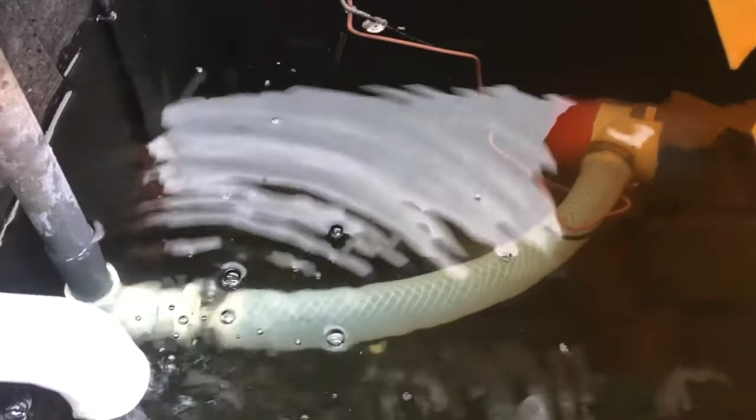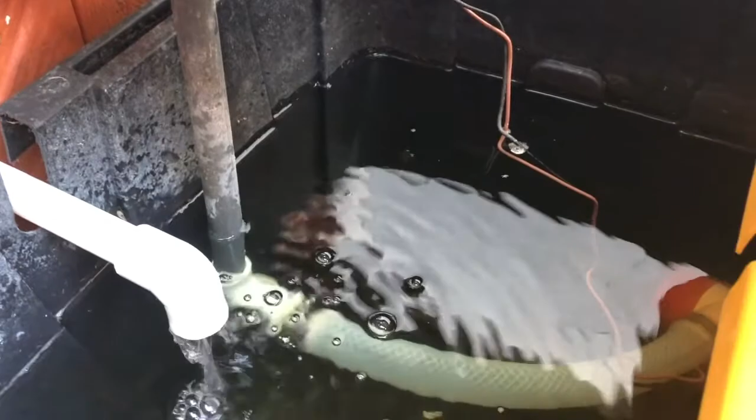And it runs on a timer, so I'm still playing around with how often it runs and for how long. But currently it runs every minute and a half or every 2 minutes for a few seconds, and it basically dumps a bunch of water in here and then it sort of slowly trickles down.

It comes down here in this last pipe and it goes into this particular reservoir. So down here you see the water flow, it sort of averages out at the bottom. You can see I have some other plants, here's the pump and so forth.

And you can see I have some other plants, but these plants currently are incomplete. Here is a little sensor that I got off Alibaba or someplace like that, that I'm planning to use for water level measurements, because the thing that happens is when it's warm, these plants consume an incredible amount of water real quick.

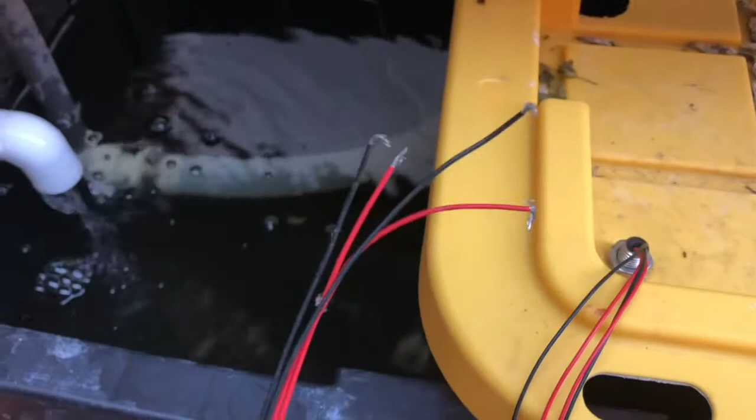And as soon as there's no water, the plants die. So it's really important that you have enough water all the time. And I tend to forget, you get busy and something happens, so I want to have notification functionality for when there's not enough water in the tank.

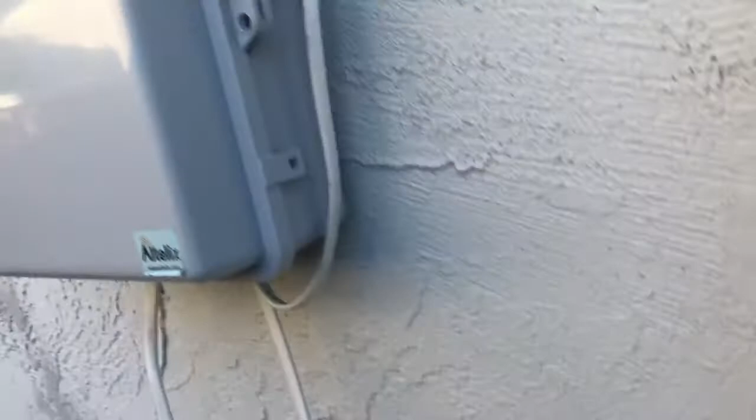So finally, this is all a little provisional. Here's my electronics box, and this looks a lot more complicated than it should be, but it is. So what I ended up doing is - let me go back to the old system. That's the old system from the other side.

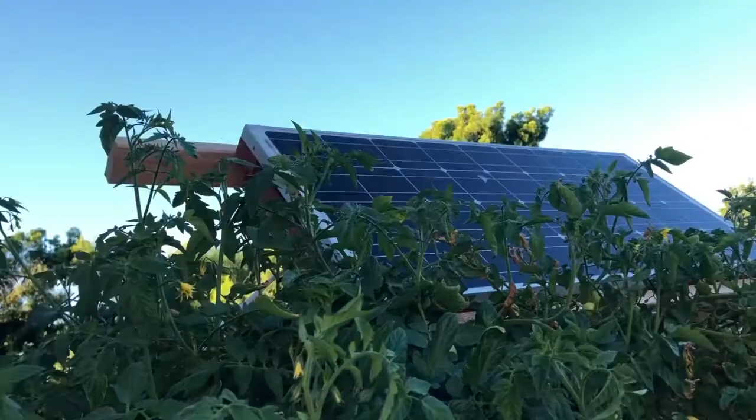There is the solar panel up here, which was basically the cheapest solar panel I could find on Amazon. And then down here is a little box that contains a battery. So this is now an off-grid system, which is nice because if power goes down for whatever reason, my plants don't die.

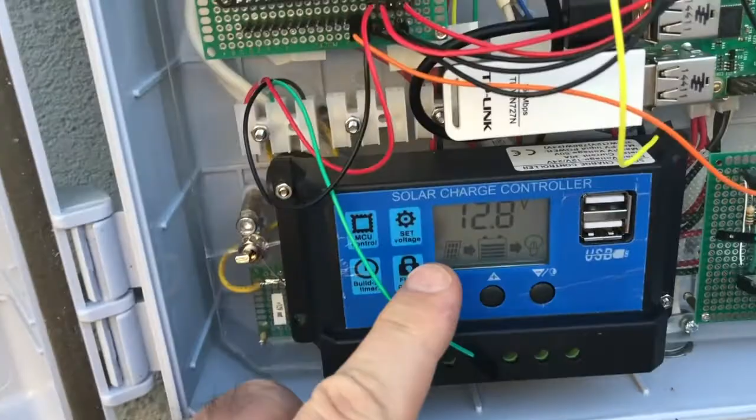And there is in here in my electronics cabinet, there's a little charge controller. And then there is a little ESP32 for the electronics people among you that currently doesn't do anything other than run this timer for the pump on and off on some schedule.

There's also a Raspberry Pi in here, mostly because I do not want to do software updates over the air for this thing and break it. And then the system doesn't work and the pump doesn't work and all the plants die. This is like a production critical, mission critical system - all the plants die. Several months of growth might be gone if something is wrong with my electronics.

So I know how to update things over the air with a Raspberry Pi. I don't know the ESP32 very well, and I will screw it up. So I put this Raspberry Pi in there as well.

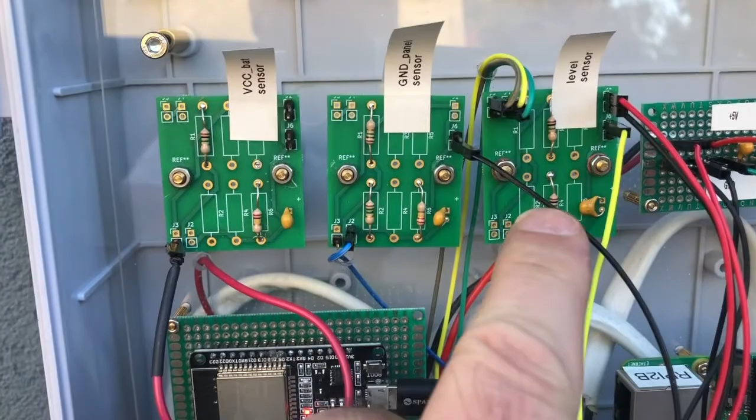And there's a few other boards which are mostly making it easier for me to do some sensing that I'm not really doing yet. Like I want to track the levels - this is supposed to be connected to the level sensor over there. And various other things, so there's more work to be done. And I put it in this box so it can rain on it.

Okie dokie. And I think this is basically the overview of the system. And I'm going to come back and switch back to my other system here.

And we can have a conversation, or if there are any questions that you might want to have at this time before we go on - is that a good idea? There is some in the chat.

Okay, do I grow tomatoes in the winter? I do not know whether I grow tomatoes in the winter because I just started growing them. These are this year's, so not much happened during the winter. So I live in Northern California. It doesn't get terribly cold, but all the plants sort of stopped doing very much. They didn't exactly die, but they didn't exactly grow either.

I'm still learning, I'm new to this. I'm presenting work in progress. I have no particular expertise other than what I've basically tried out myself.

How did I get information on how to do the electronics related system? Theoretically, I learned that in school, but it was a long time ago and I forgot about most of it. So my professors would be unhappy if I didn't remember enough to do this.

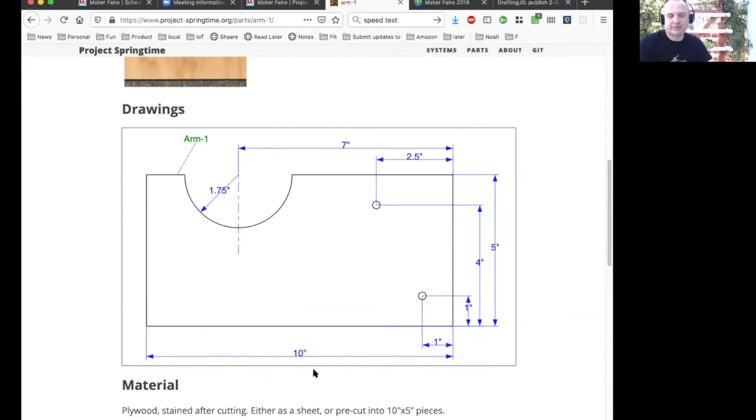Let's look at this arm. What is this arm here? Arm 1, when you click on it, you can also find it through the parts. It's a description of this arm. Here's some pictures for it, and here's a drawing for the arm. And then here's the tools for how to make it. The material is plywood, stained, and here's some tools for how to build it, and here's some construction advice.

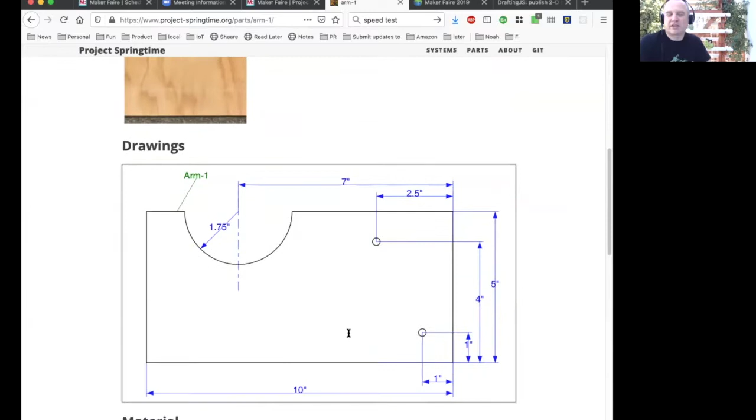So the idea here is that even if somebody doesn't know very much about how to do these things, right now the assumption is that you know how to read a technical drawing like this one, and you can translate that into practical activities to actually make it, following the instructions.

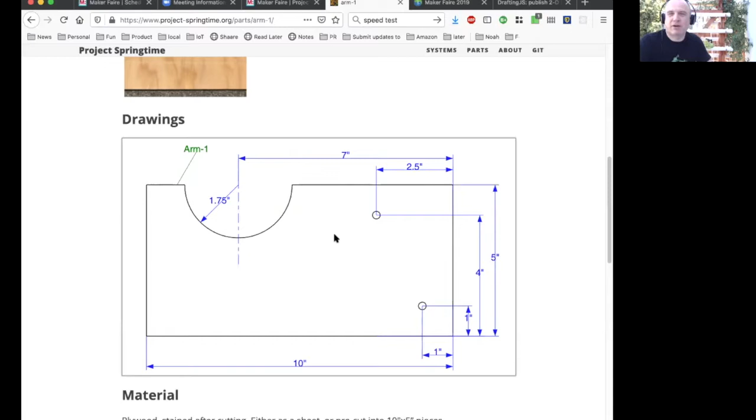You can do this. By the way, I should mention it is incredibly difficult, I found, to put a little drawing like this online. You'd think you should find some open source CAD tool, draw this thing, and have it online in like an hour or something. That did not turn out to be the case. I spent way too much time investigating pretty much every open source CAD tool I could find, and eventually I decided, screw this all.

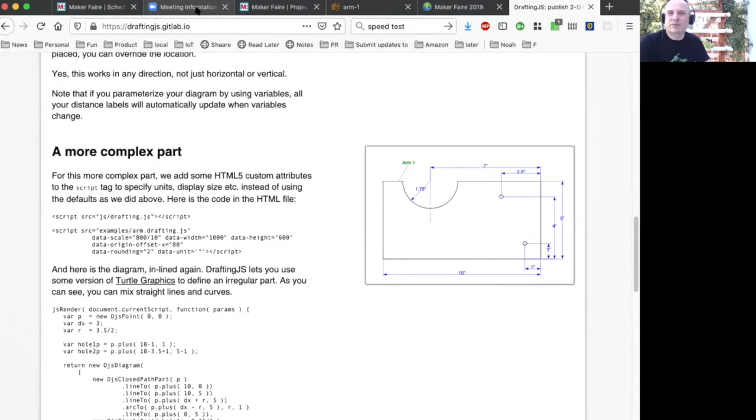So what I actually decided to do instead is build this little thing here, a side project called DraftingJS, which lets you publish simple blueprints, including the one I just showed, with a bunch of JavaScript. That was a side project—I didn't intend to set that out, but it turned out to be easier to write that library than to get some open source CAD tool to produce something I could actually put online.

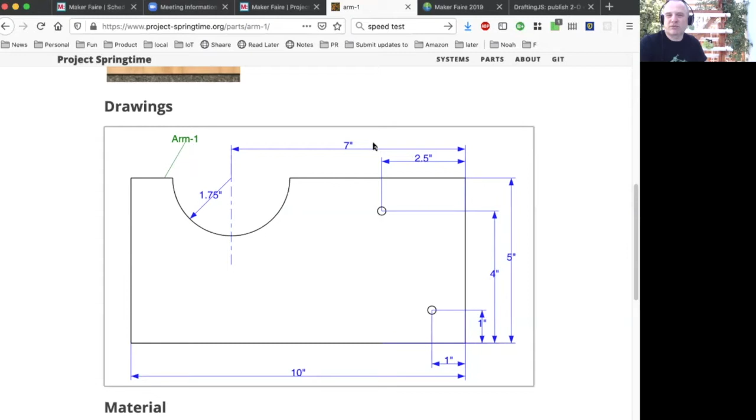So this is just a few JavaScript statements, and it renders this appropriately, which makes it easy from an improvement, open-source-style kind of thing. If somebody figures out it would be a better plan—instead of having this be 2.5 inches from the right corner, but something else—then it becomes a very straightforward diff to what was there before, which can be easily merged and easily reviewed, rather than the blob file that comes with a CAD tool.

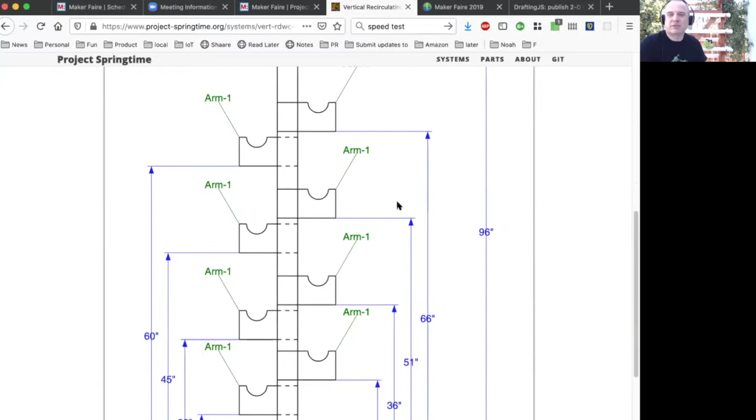So let me go back to my system. Here's my bill of materials. Here's the blueprints for the basic system. You can see how the arms and the post are assembled. Of course, there's no need that the measurements have to be exactly the same, so I'm just documenting what I did, what sort of worked for me.

And then instruction sections, and then let me go to the systems model. I was also attempting to document how this actually works. How does the system actually produce plants? I just came up with this thing. I call it a process model, which is a little bit overstated in this case. But it's trying to say what's the inputs, what's the outputs, what's the environment that's required, and then what do you do on a daily basis?

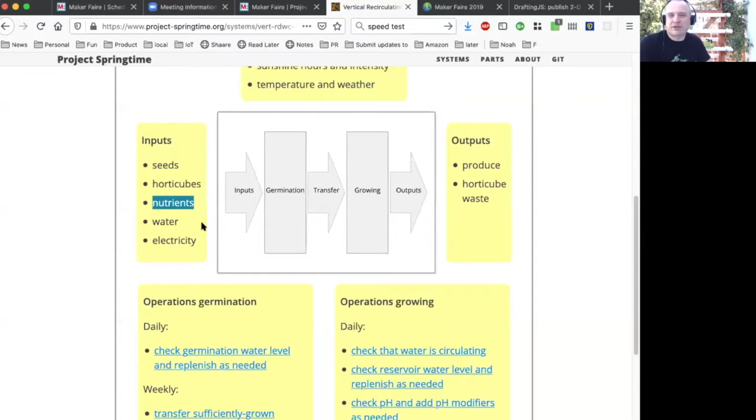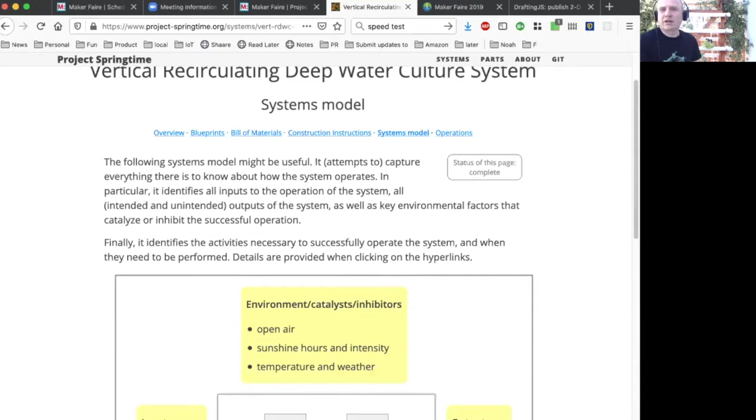So we could click on what is the nutrients that are put in there. By the way, I forgot to mention this, let me quickly show this one. The nutrients that go in here are salt-like substances I buy. They come in different combinations, 1 part, 2 parts, 3 parts. I'm currently at the 3-part thing. Basically what you do is measure them according to the instructions and dissolve them in the water, and that's the nutrients. You have to monitor on an ongoing basis how much of the nutrients your plants have taken out. It all depends on the weather, what plants you have, the growing phase, and all sorts of things. So one of the things you want to do on an ongoing basis is measure the pH of your water.

Somebody is not on mute and is doing all sorts of things in the background. Could whoever is not on mute please put themselves on mute?

Thank you. And then the other thing is essentially a measure of electrical conductivity, which gives you some idea of how much of those nutrients you actually have in the water. I've found that my plants are pretty tolerant if I'm not exactly staying within the ranges here.

Somebody else is also not on mute. Can you please put yourself on mute if you are not speaking? Thank you. Okay, are you on mute? Yes. Is he trying to talk to you? Okay, somebody just said they're on mute, but we could hear you, so probably not.

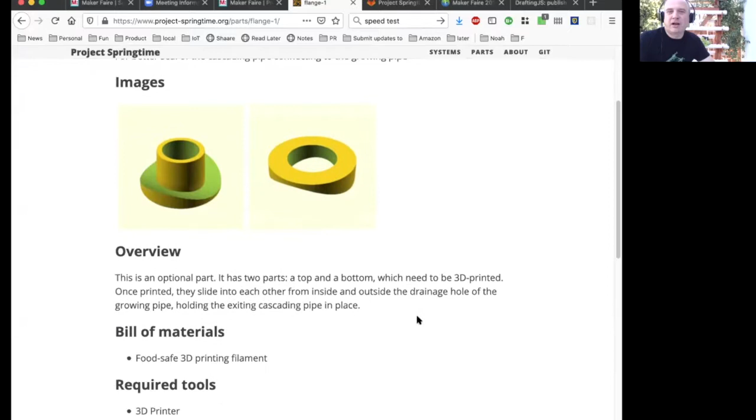I want to show the 3D parts here. For example, the flange, these two particular parts that are deep in there somewhere, I didn't show them, which I'm 3D printing. Here are the OpenSCAD files that I'm using to print this. It's also not very complicated. Obviously we could use different tools, but it's the one that I'm using.

You don't necessarily need a 3D printer for doing this. It just turned out that for me it was very convenient to have one, because whenever I thought, oh, that would be much better if I had this little piece, let's try that out, then I would have it around and just try it.

For example, let me show you this one here. This is a little thing that actually has 3 parts, you might have seen it in System 2 over there. So I'm taking this basket, there's a plant in it, in production, and I'm putting these two parts here on top in a way that covers it. The reason is that less light goes in, so they have less algae, and also because it helps a young plant stand up better so it doesn't fall all over.

Over some trial and error, I don't know how well you see this little slit here, I opened it up so that I can also label my pots, my baskets here. The reason I want to label them is because I'm no good at remembering which plant this was and which variety of cucumber. So I'm trying to write it down and trying to come up with a scheme by which I can track this.